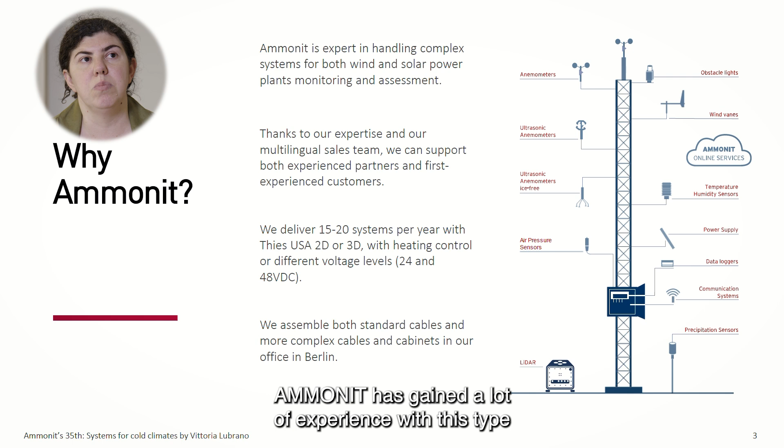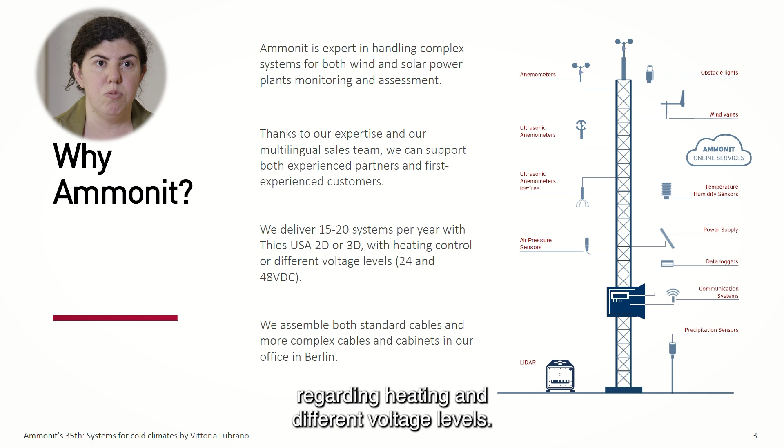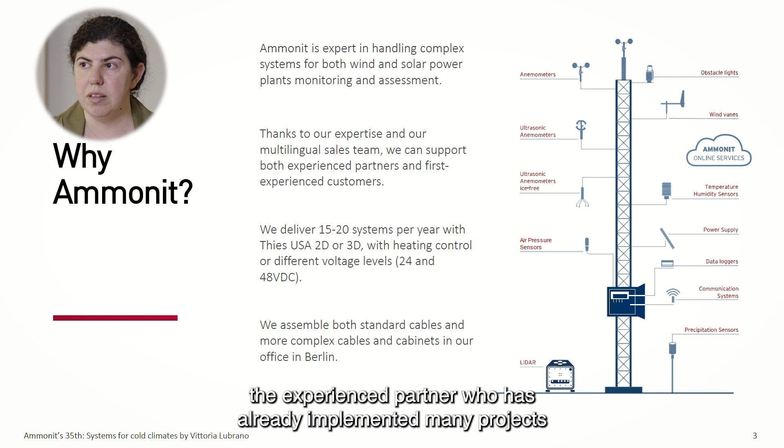You may ask why you should go to Ammonit for projects that take place in cold climates. That is mostly because we have a lot of experience with this type of installation. In the last years, we regularly delivered systems with complicated sensors with heating and different voltage levels. And we can support both experienced partners that have already made many projects in this type of field, but also brand new partners or customers that have no idea how to approach this type of project and need suggestions.

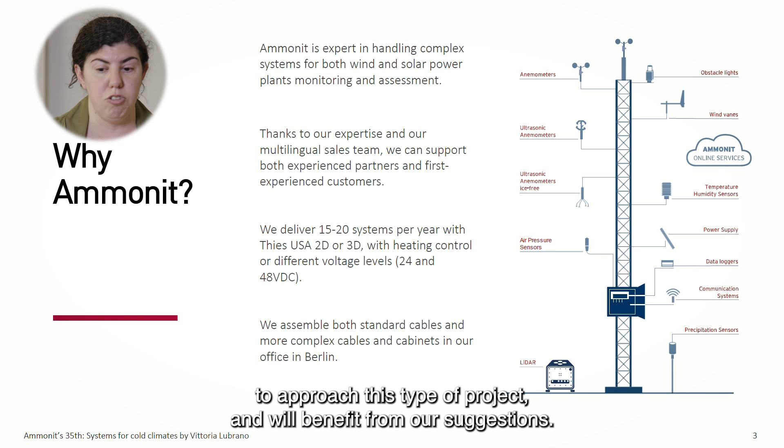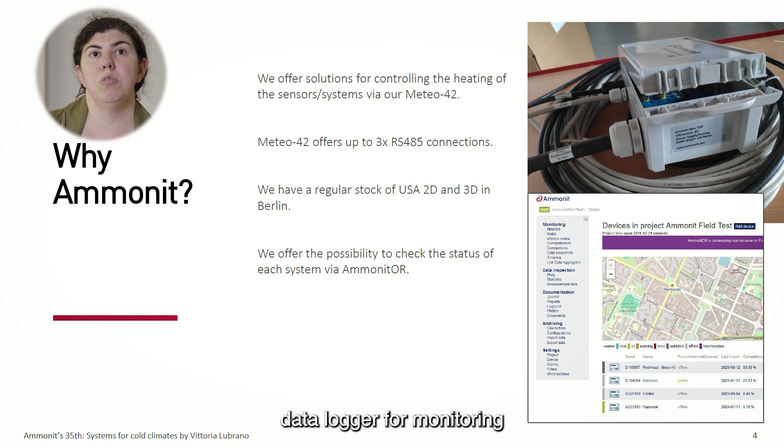We have our office in Berlin, and here we can provide you also with the cabling and the cabinets, which are all produced in Germany, in Berlin specifically. And with our data logger, we can also provide you the monitoring and checking of your project once installed using, for example, our software platform AmmonitOR.

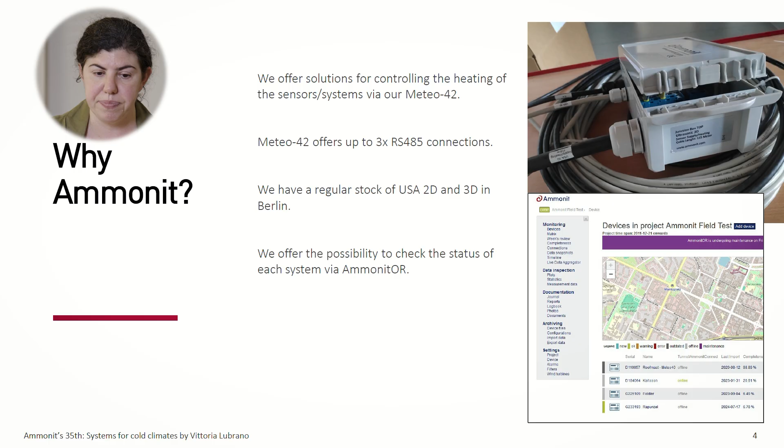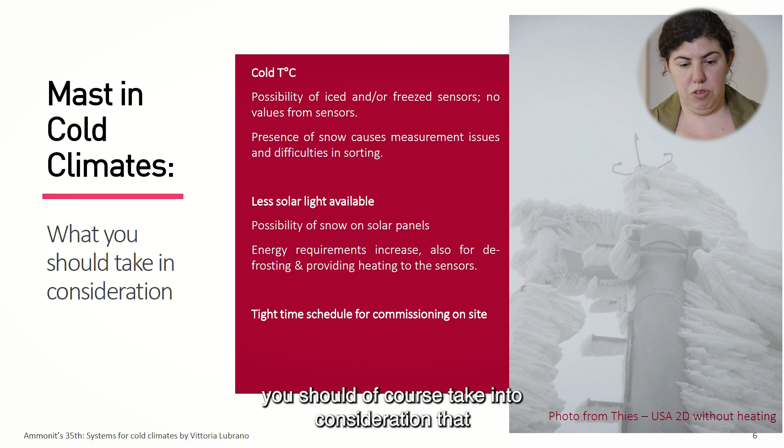What you should first take into consideration is that in this type of environment, the temperature will be lower than in the usual type of mast installation we are all used to. This means your sensor can be iced, but also completely frozen. Plus, the snow presence can also make your measurement unreliable and so not usable for your campaign.

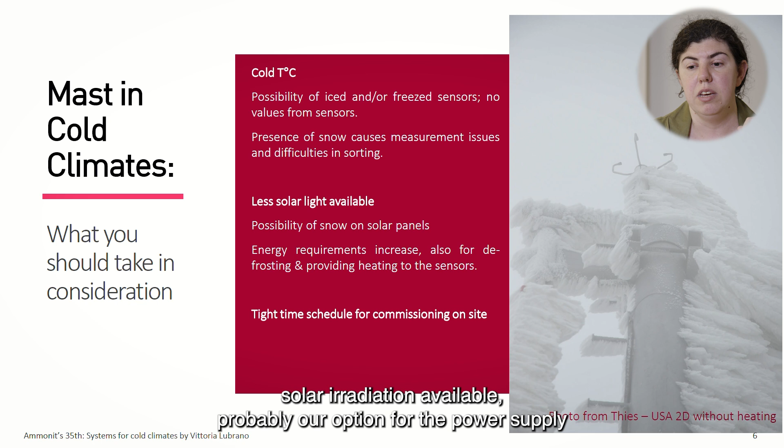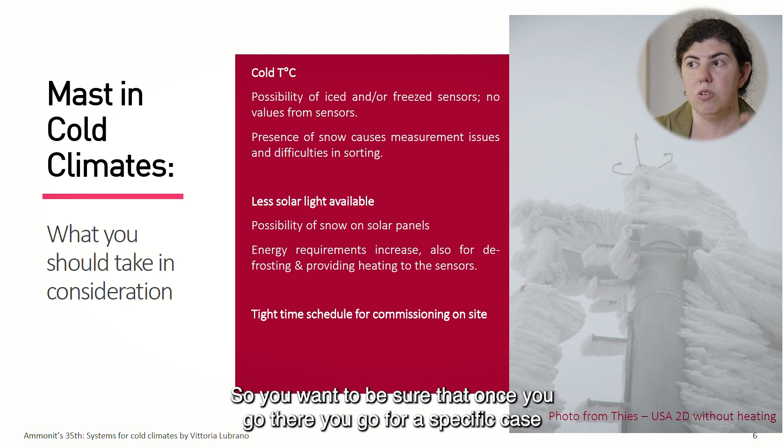In this type of environment, there is less solar radiation available due to the snow and the clouds, and all this must be considered when you plan, for example, to use a solar power supply, and also when you have a lot of sensors that have to be heated. With less solar radiation available, your power supply will probably switch to another source. You also have to take into consideration that visits on site will be limited in time, so you want to be sure that once you go there, you go for specific cases and specific handling of problems.

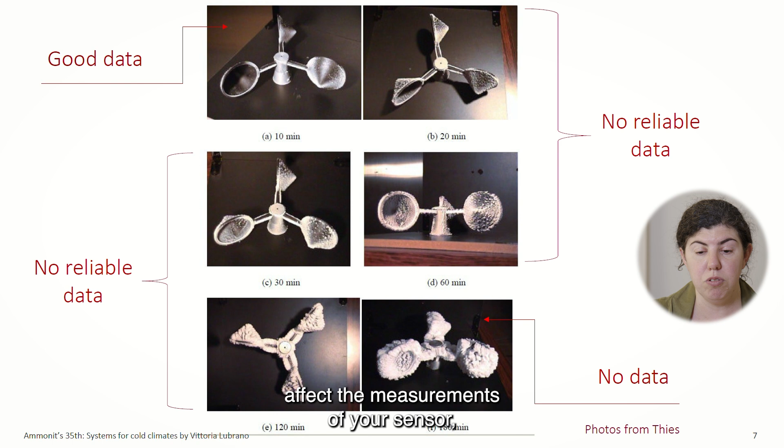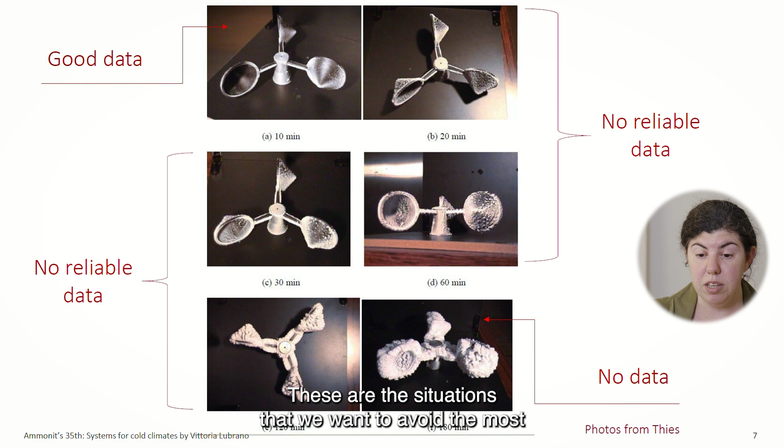The situation is more complicated for all the other time steps, because here the snow and the ice affect the measurement of your sensor. But this is difficult to figure out without seeing the sensor live on site. These are the situations we want to avoid most, because your measurement is not reliable, but your sensor is still measuring on site.

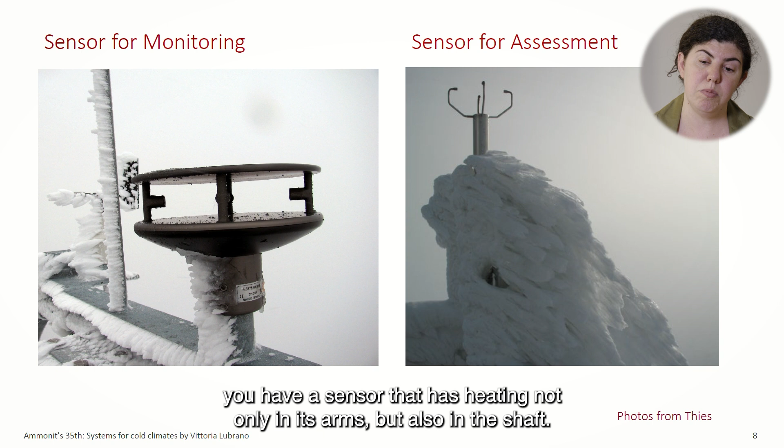To avoid this type of situation, we recommend using a sensor with incorporated heating. According to the type of mast you are going to use, whether for monitoring or for assessment, there are different solutions. For example, here you have a sensor with a little roof above its terminations, where the measurement takes place, and this protects the measurement. Or, on the right side of the slide, you have a sensor with heating not only in its arms but also in the shaft. As you see, this allows the sensor to continually provide reliable measurements even when the situation around is pretty harsh.

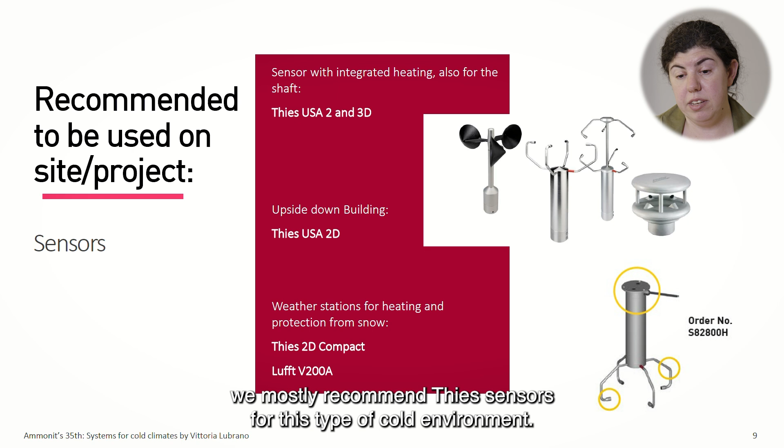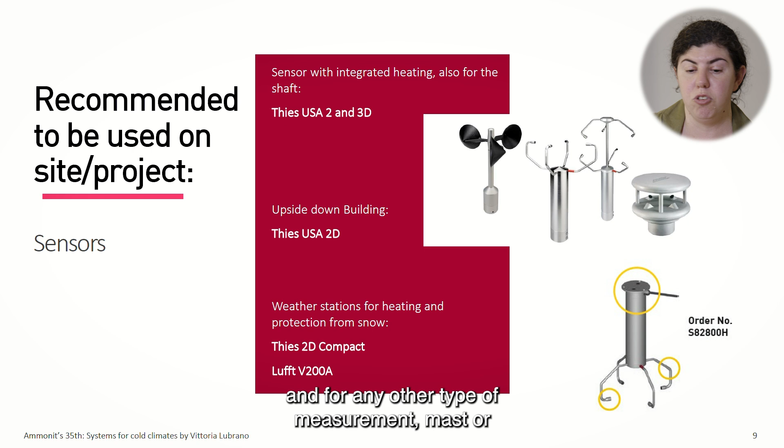At Ammonit, we mostly recommend Thies sensors for this type of cold environment. We have a lot of experience with the ultrasonic anemometers, in particular the 2D and 3D. There are also specific settings from Thies regarding the 2D, this upside-down configuration, and for any other measurement mast or installation, we can also provide a compact solution and weather station.

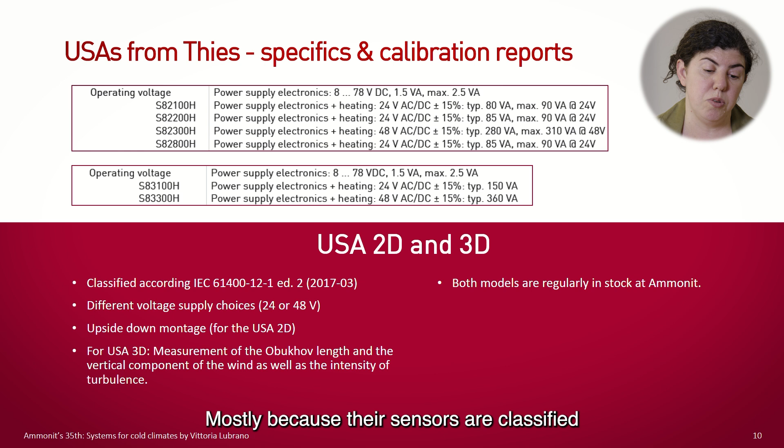Mostly, as I said, we work with ultrasonic anemometers from Thies, and this is mostly because these sensors are classified according to the latest IEC norms. They present the possibility of having different voltage supply, as shown in this slide. This allows us and our partners to configure their mast and their power supply as best as possible, and also according to the options available on site.

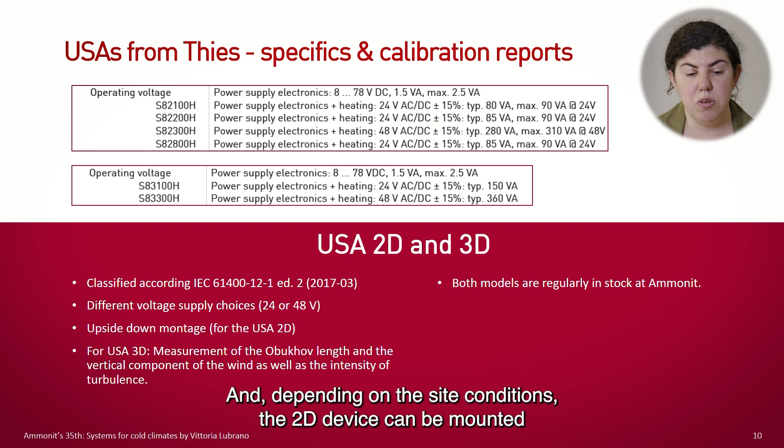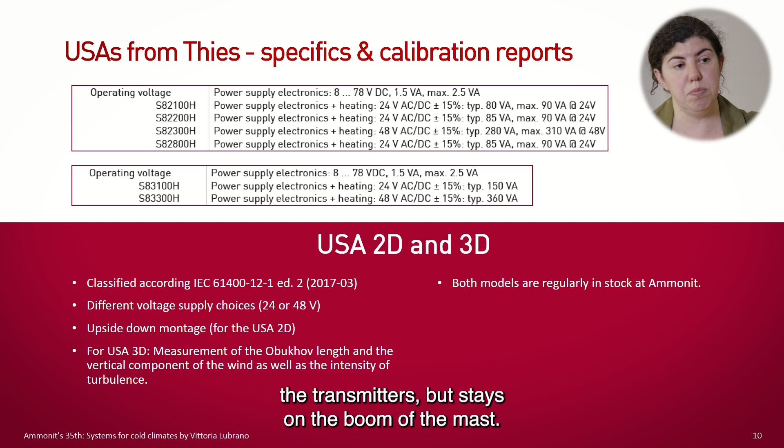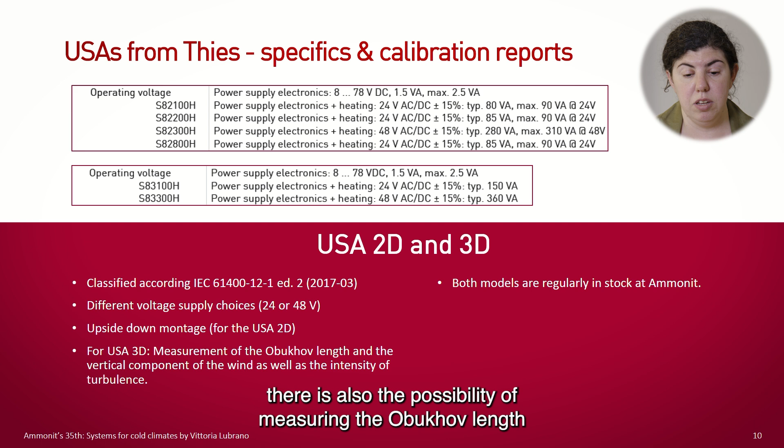As I said, the 2D has the possibility of an upside-down mounting that allows the snow to settle not on the transmitters but on the boom of the mast, saving the measurement from any influence of the snow. For the 3D, there is also the possibility to measure the Obukhov length and also the vertical component of the wind. Usually we have both these models in stock, ready for you to order and delivered to your site. This reduces the time you have to wait before planning your installation on site.

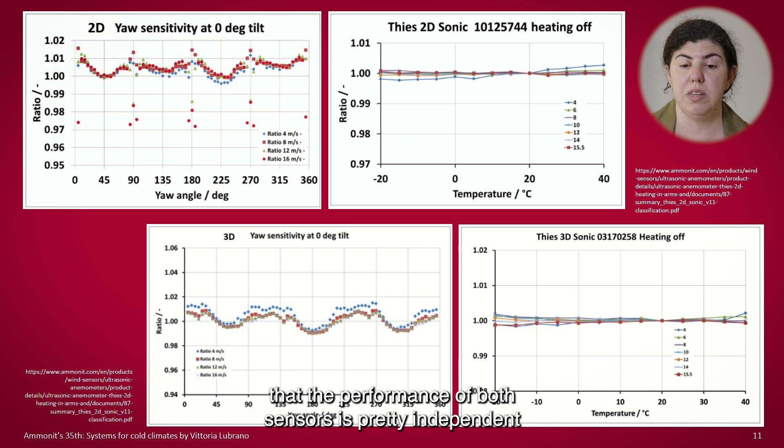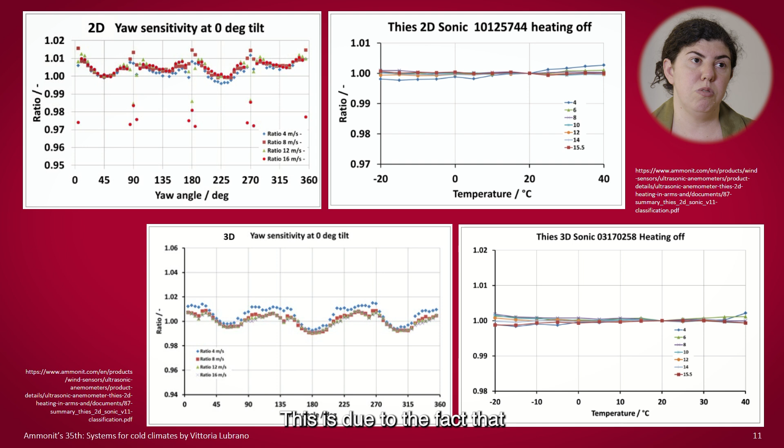Here we are showing some extracts of the calibration protocol that we usually perform for the 2D and the 3D. From this slide, you can see that the performance of both sensors is pretty independent from the external temperature where they are being used, and also that the 2D has an effect on the yaw sensitivity, mostly due to the fact that there is a back zone. So there is a zone in the back of the arms where the measurement cannot be as precise as it is in front. And this is completely not present for the 3D, as these two figures on the left show you.

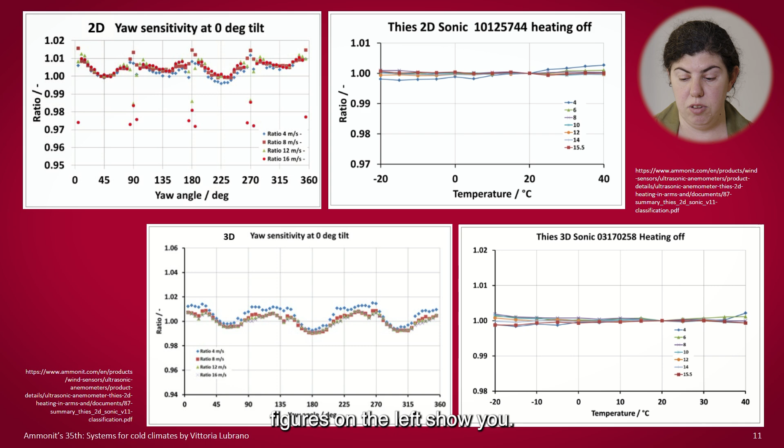One question that we are asked often is the difference between the internal heating of the Thies sensor and the AD/IO function. The internal heating is an aspect that many Thies sensors have and is an internal regulation which cannot be controlled from outside the sensor. There is a temperature sensor inside each heated sensor, which automatically switches the heating on and off according to the measured external temperature. In the case of Thies, most of the time this kicks in at around 5 degrees and switches off at 8 degrees. This allows the sensor to keep its external surface free of ice. And this is a solution that, as I said, cannot be controlled from the outside.

It is not programmable. The AD/IO function is a particular configuration that is present only in the ultrasonic anemometer and is a free pin on the sensor that can be configured both as an input and an output and can receive both analog or digital signals. We have developed a configuration where we use this pin as an input, and we connect it to our data logger through a switch, and using a 5-volt signal, we tell the ultrasonic to turn its heating on or off according to the customer's desire.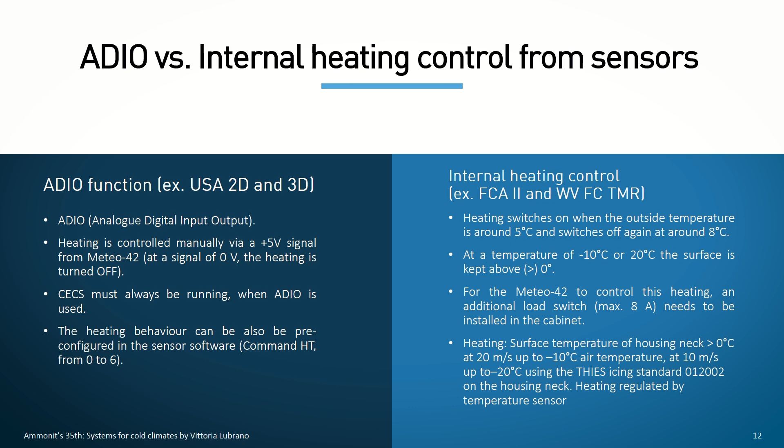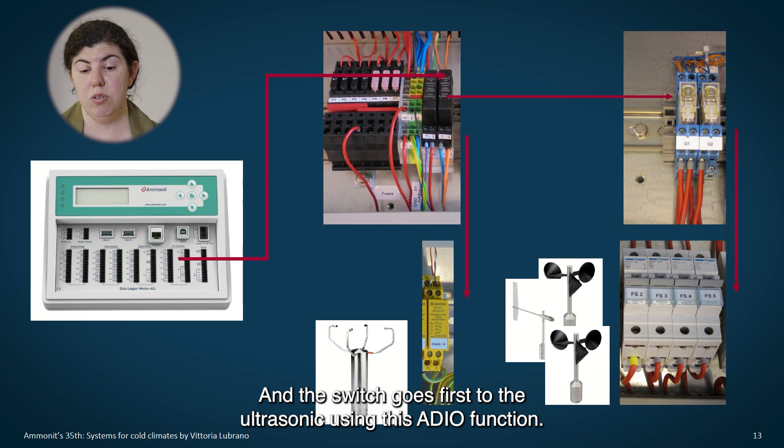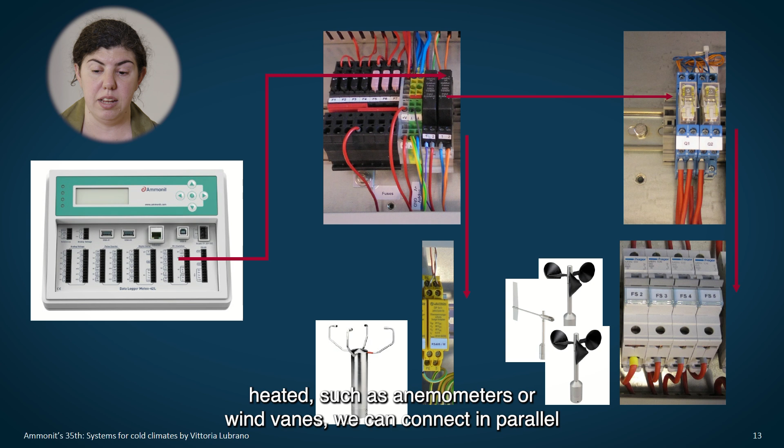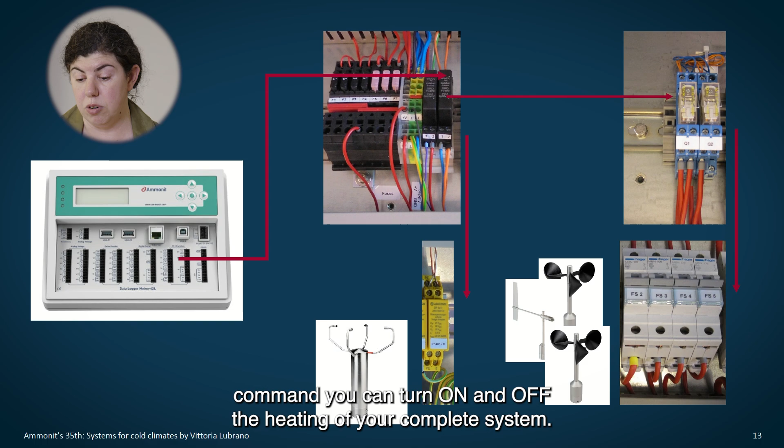Here you see a representation of the system that we usually use with our Meteo-42, which is connected to a switch, and this switch goes first to the ultrasonic using this ADIO function. For complicated installations where other sensors are also heated, like anemometers or wind vanes, we can connect more switches in parallel so that with one command you can turn the heating of your complete system on and off. This allows you both to activate the heating in conditions where it usually would not be activated, and to turn it off when it is on but you want, for example, to save power and don't want the heating to run too long.

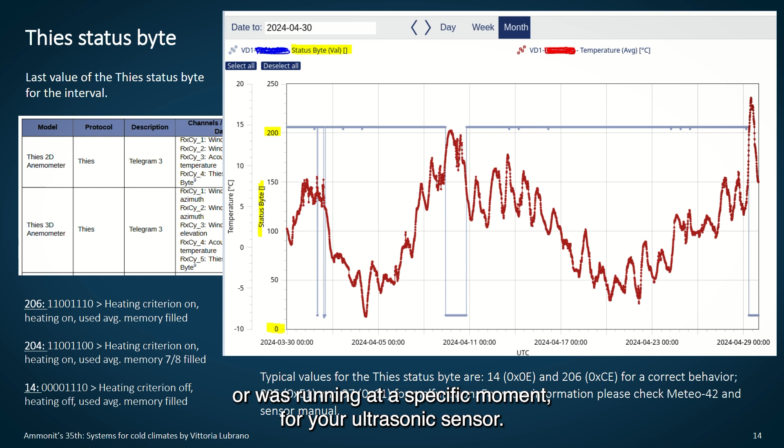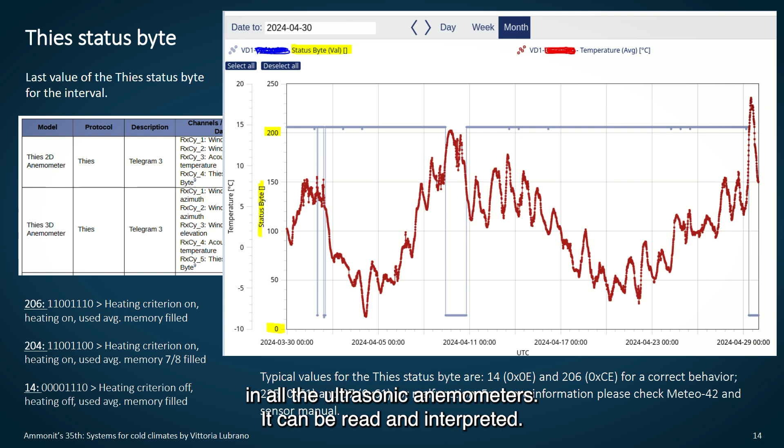One thing that we recently implemented for our data logger is the possibility for the customer to know which Thies status byte is currently running or was running at a specific moment for your ultrasonic. This is actually a register present in all the ultrasonic anemometers that can be read and interpreted. Here you have an example picture taken from our monitor of an ultrasonic status byte, indicated with the blue line, while the red one is the ambient temperature. The status byte has different values: it's constant at around 200, then has some sudden falls, and then is again at 200 plus or minus.

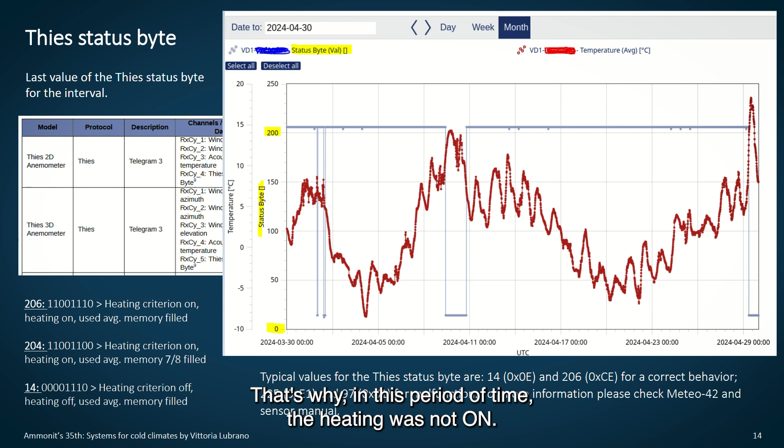Here you can see what this register means: 204 and 206 are values that say the heating is on because the criteria are met, but these low falls correspond to the register 14, which means that the heating criteria were not met anymore in this specific period of time. That's why in this period the heating was not on. This is an instrument that can help a lot in handling your ultrasonic.

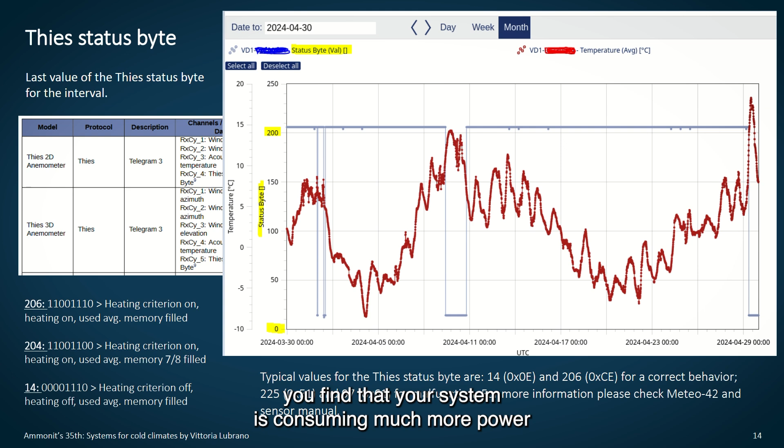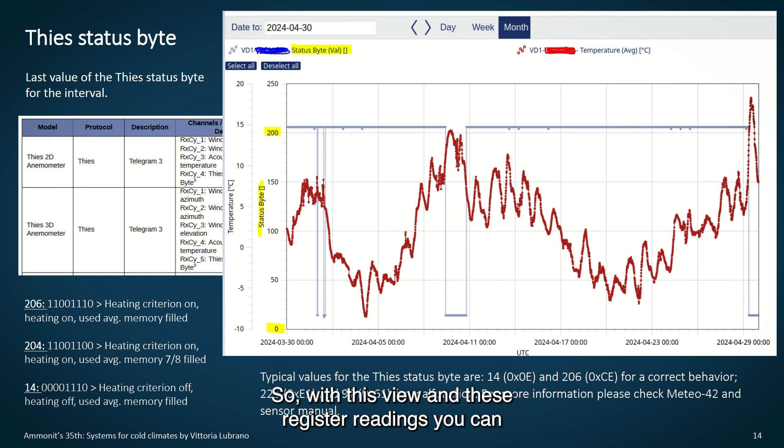Overall, if there are malfunctions or you figure out that your system is consuming a lot more than expected and you don't know why, probably it's because the heating of your ultrasonic is on more than you originally planned. With this view and this register reading, you can easily figure out all these events that happen to your installation.

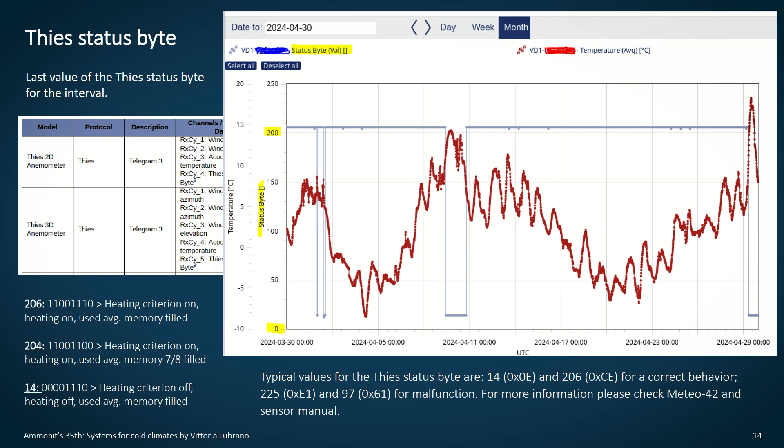As I said, at Ammonit we also provide cabling for these cold climate environments and installation. Generally speaking, we use a solution with junction boxes, mostly because the sensor from Thies but also from other manufacturers always comes with a specific plug that cannot be changed, and thicker cables that are required in this type of installation, mostly for the voltage loss along the cables, cannot be soldered in these plugs. So the junction box is a solution that allows us to use larger, thicker cable, but still be able to connect to the sensor in question without major damage to the sensor itself.

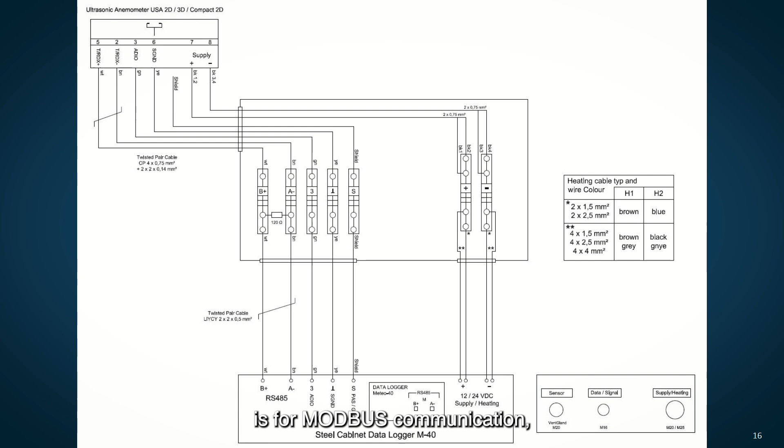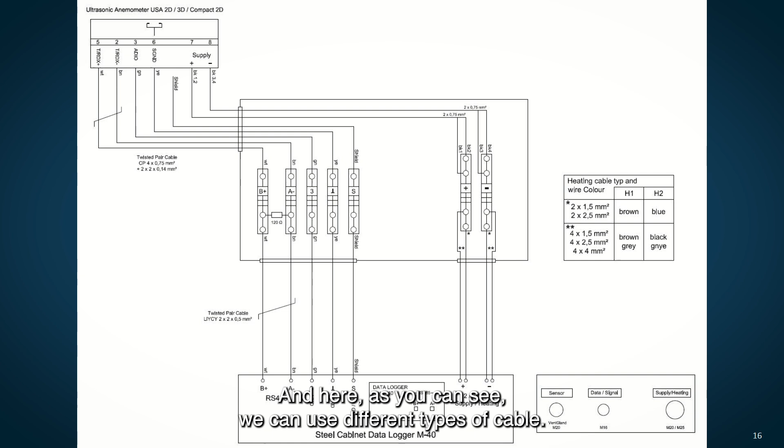Here you have a picture of a standard junction box cable that we provide. The sensor is connected using a short cable to the junction box, and in the junction box the cable is divided in two. One part in this case is Modbus communication, so RS485 cable with this termination too. And the second part is the heating. And here, as you can see, we can use different types of cable. They are all manufactured by us in Berlin. And this cable then is connected to the cabinet of the data logger. This is a pretty standard solution nowadays, so we have provided many of these cables in the past years.

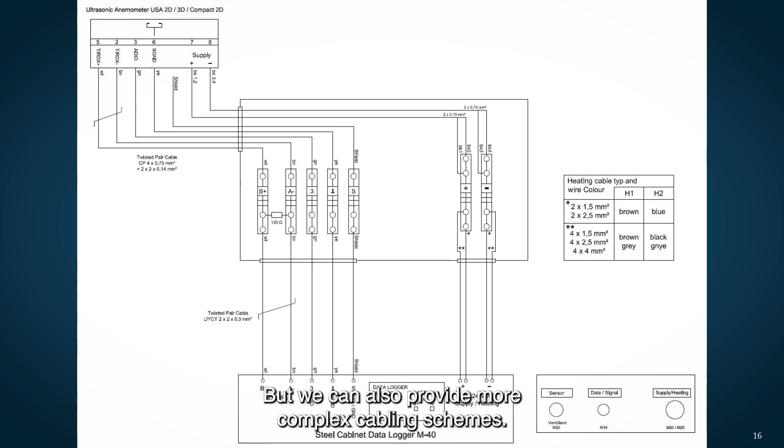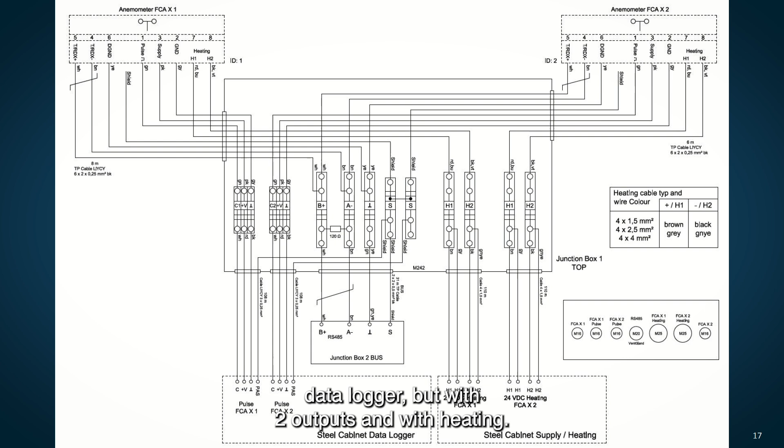We can also provide more complicated cables. In this case, now that I'm showing, you have actually 2 anemometers FCA-X that are connected to our data logger, but with 2 outputs and with heating. So we have the RS485 connection, we have the counter connection, and in this case, for this junction box, also 2 separate heatings. This is usually separated because if one of the two loses, let's say, the connection to the supply cabinet, the other one can still run.

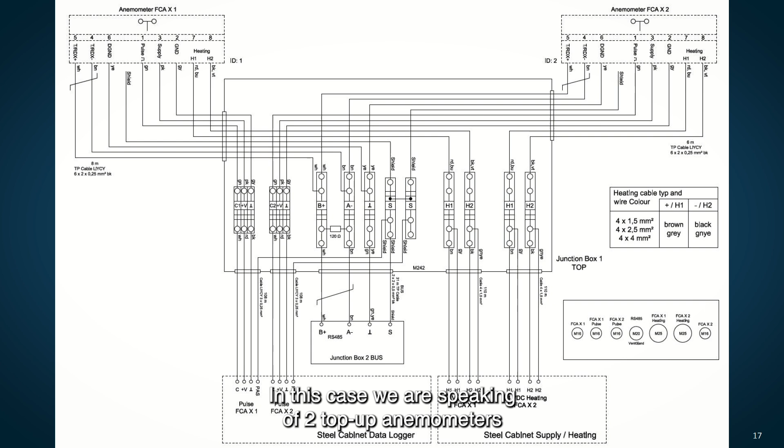And in this case, we are speaking of 2 top anemometers, which are connected to the following junction box, where the third anemometer is installed a bit lower. And finally, the last one. So in this project, you have a very complicated cable with 3 junction boxes, 2 outputs, and heating, and 4 heatings separated.

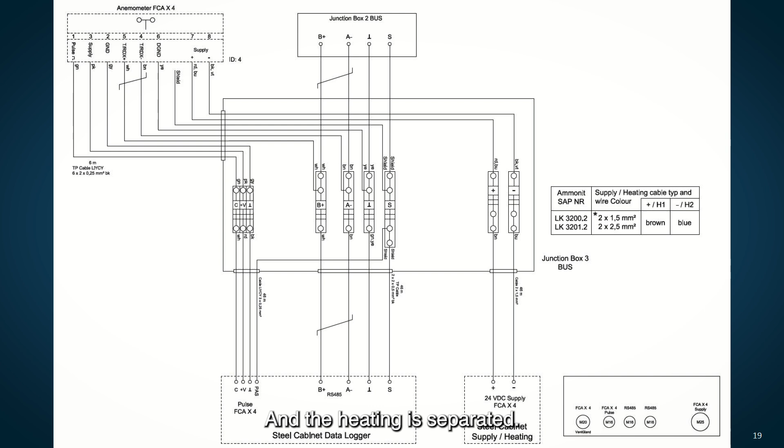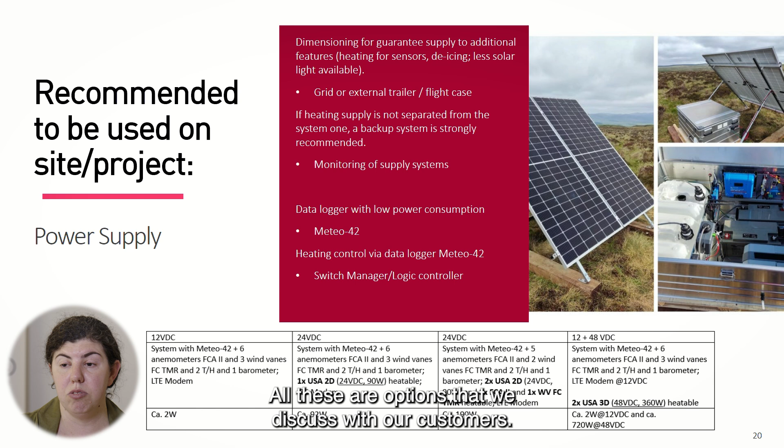Due to this, you will probably not use a standalone system, but maybe you prefer to connect your system to the grid, or use a trailer that has maybe ethanol. Of course, these are all options that we discuss with our customers, also according to their availability. A thing that we recommend is that whatever power supply is being used, monitoring of it should also be taken into consideration, because this already gives a sign that maybe a visit on site is required.

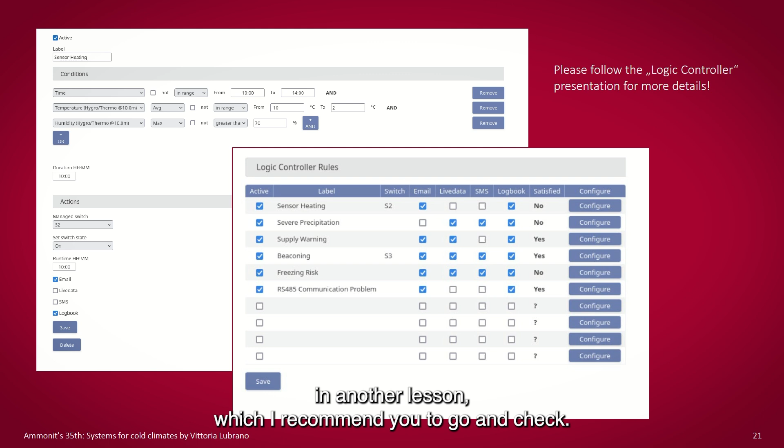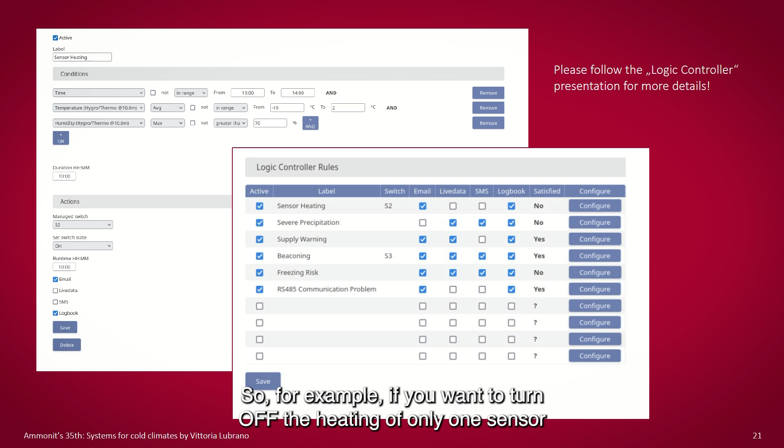But what's important for you to know is that with Meteo-42 you can configure more switches and so also regulate and change things in your system. So if you want to turn off the heating, for example, of only one sensor instead of two, or you have an alarm installed, all of this will now be possible with the logic controller.